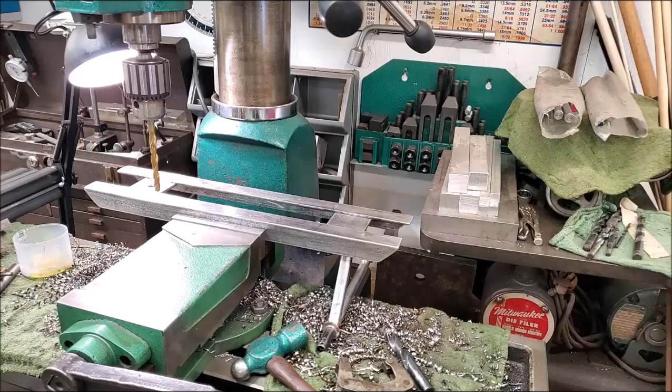Oh yeah, the first indication was to get this little Starrett. It's about 3 inches long or so, and it cost $14.96 at some point, at least that was the price.

But to drill 4 holes in that setup, one rail clamped into the vise, to drill them holes straight up and down, perpendicular to the earth, you call on that little level, wipe it clean on the bottom, and then I'm gonna put it right there. And if you look at that, I'm not sure we're seeing the same thing.

Oh yeah, that's pretty good. I should get a close-up of that.

So anyways, to confirm that this little bitty thing right here is good, I'd fall back on this. This was in a tool kit one time, and I dropped it on the floor, and the little thing on top with the hole in it fell out and has been lost since. But I still rely on it if I want something to be fairly precision over a length of this amount. I call on this level. It serves me.

And kind of where we're up to right now, the present, is just waiting on the paint to dry. Got all the parts there, and we'll put another coat on there, Rust-Oleum. That's that 100 green right there.

McCormick Deering Type M, 1.5 horsepower. We'll have that Bosch Magneto mounted. 1923 year model.

Well, you know, I'll let that Rust-Oleum right there dry for about a week or so, then put another coat on there.

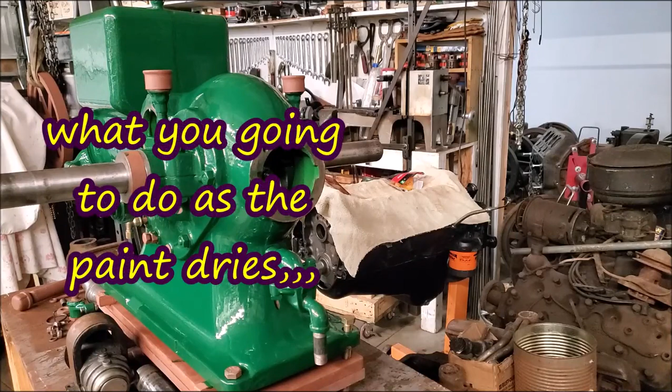Well, in the meantime, I can go ahead and get that fuel pump working. I'm just going to take a wooden dowel with some of that coarse valve seat grinding compound on the stick, appropriate angle, hand drill, and I'm gonna freshen up that seat in that fuel pump. I'll throw a couple of new check balls in there, and I think it'd be good to go with that new plunger shaft, and we'll add up the cost on all that.

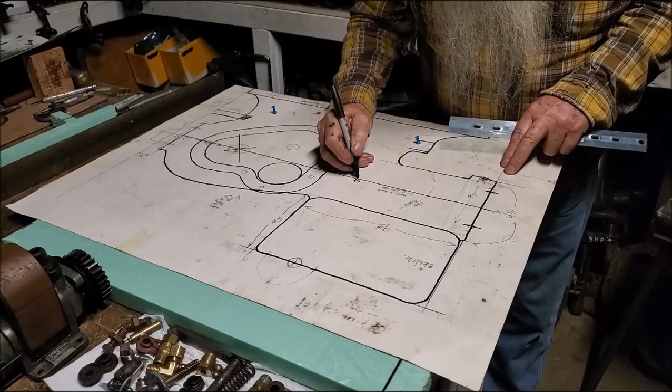Okay, I think we'll be able to work with this. So, this is what we got to work with. I'm just saying.

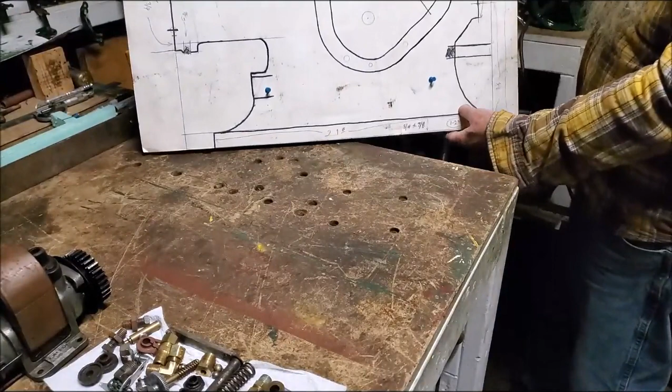That's it, it's going to be on the test, you know. Took notes.

1923 McCormick Deering, that's one of them type M's right there. Got one of them Bosch magnetos to go on it. It's got a spacer plate underneath that magneto to align it up with the gear set that's in this engine here, meaning it could be used on some other application without that spacer in there.